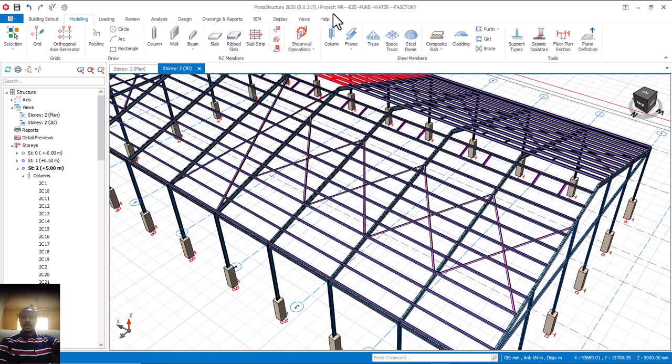This is ProtaStructure 2025. As you can see, Mr. Eze Pure Water Factory, you can see it here. It's still in the process, we are trying to do the roofing. So now we are still modeling, as you can see.

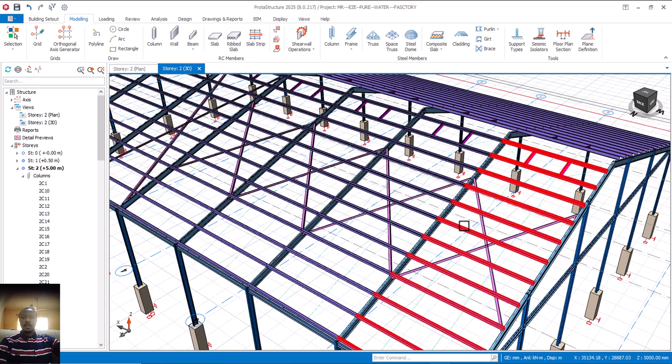We want to show you how to do this kind of bracing in Protastructure 2025. Can you see it here? This kind of bracing, if you look at it, is different from this one here, different from this particular bracing here. Can you see it? How do you make this kind of adjustment to it? And if it's double, how do you want to go about it?

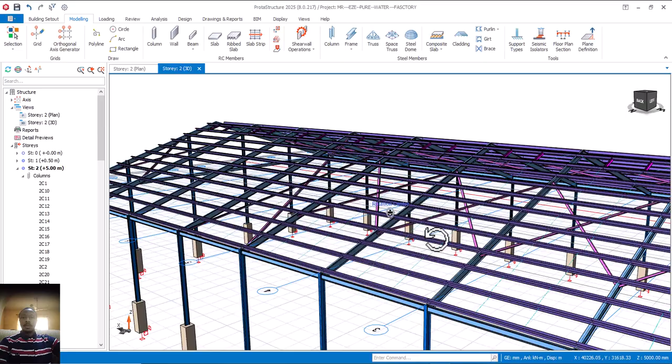All of this, I'm going to be showing you, at the same time the connection, in this particular video. Please, stay tuned, don't leave. Let's do it together to the end.

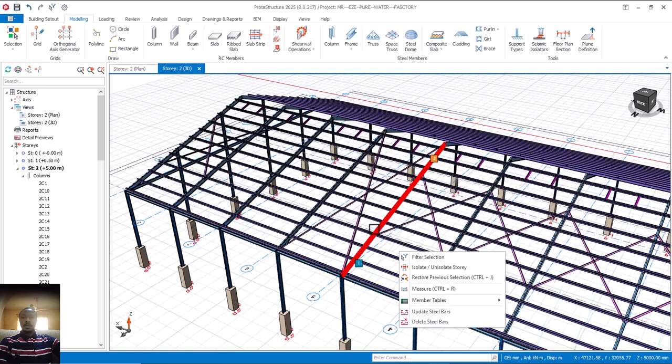So let's now see how this can be achieved. For now, I'm going to delete this one so that I can now show you how to go about it. All right, let's wait for it.

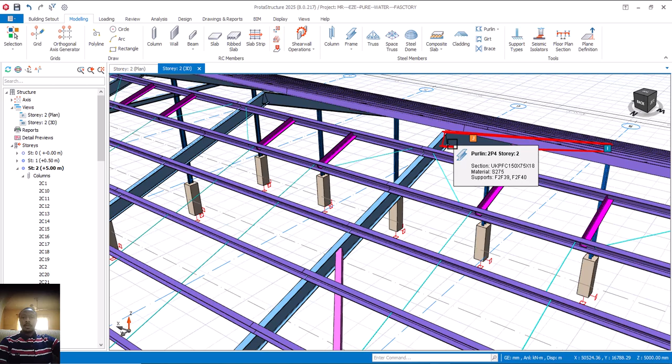Okay, deleted. So now for us to insert this particular type of bracing, because if you look at it, there's a support here, isn't it? And also towards the end here, there's going to be a support. But in between here, from here to here, is actually long to leave without being braced.

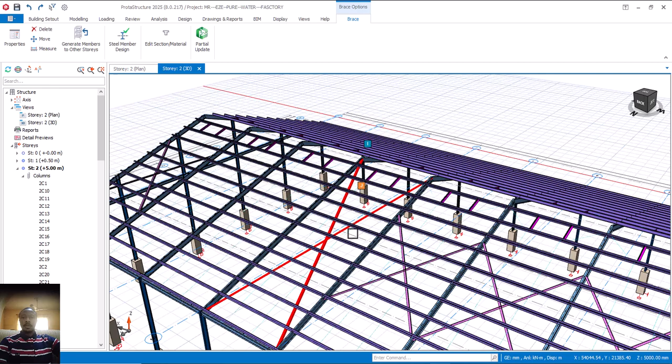Now, if you look at the one I just deleted, let me undo it, let it come up. Can you see? If you look at the one I just brought back, can you see the method of support from this place? Whereas there's going to be a support here also, and down here there's going to be a support too, a connection around this place, isn't it?

So that is fine. This kind of bracing is good, but looking at this span, I prefer this one, it's much more better, far more better. So let me delete this one now, and let me show you how this can be done. Let's wait for it to disappear.

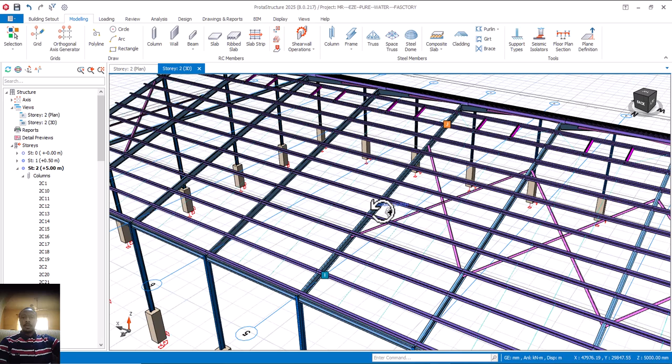All right, as I said, this is Protastructure 2025. Protastructure 2026 will soon be out. In fact, I can't wait personally, because there are a lot of things that software version will definitely solve. All right, so let's now go ahead.

So I'll come to my bracing here. Can you see under modeling here? I'll come to my bracing, come here now and click. And once I click on my bracing, I'll click on the first member and also the second member. So I'm coming, I've already done all of this one before.

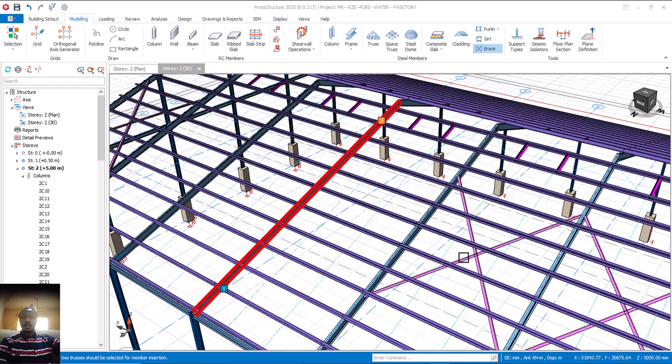So at this point now, I can now click on OK. And let's wait for it. Let's wait for it. Hold on. Can you see it now? Can we see it? You can see it now.

It has come. So I'll now go further now and click on this one and also this one. Is that okay? So it will still give us the same thing.

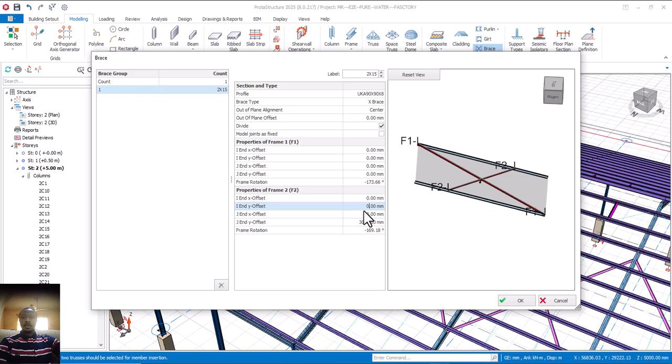But this time around, let's assume I want to make it double. If I want to now have a double, as in 2 bracing, is that okay? To have these 2 X bracing at this particular point. So first of all, you remove this distance that you have put. Remove them, turn them to 0 first. Then you can now see it now.

So you can now come to this place now and make it 2, and click somewhere else. Can you see it now? Can you see what we are having?

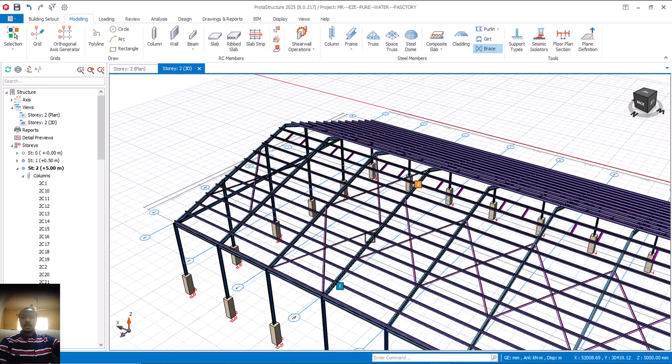So if I click on OK now, you see what we are going to have. Let's wait for it. It's coming up. Let's wait for it, correct. So can you now see the type that we have now, different from this? So this is how you make adjustment.

And also at this point now, definitely it's too close to this. You can adjust this place now. If I click on it now, I say property. Is that okay? I click on property. Let it come up again. So at this point now, here I can. Okay, this other side too. Let me see this one here. Where is it? Okay, this one I've stopped here.

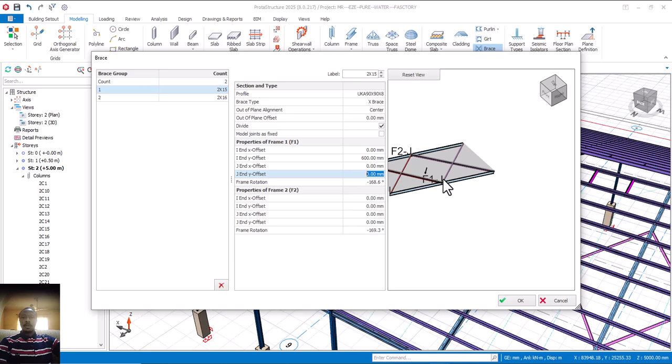So come to this other side now, this other side. Let me do this one first. 600 also. Okay, let's see. All right, this place has been done.

Is that okay? We are done with this side. So now that we are done with this side now, okay, so you can now see how we have adjusted this place now. So you can now see 600 and this other side to 600. That's why you can see here 600 and this one 600. Can you see it now?

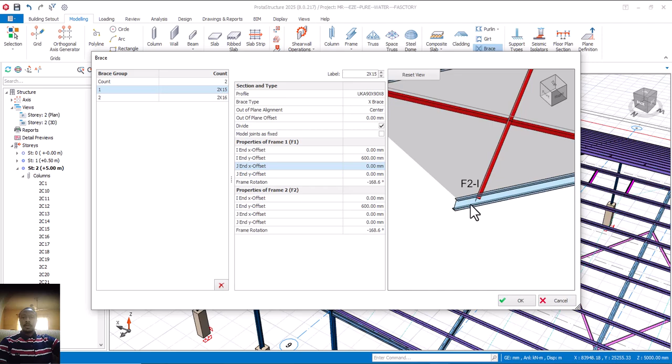So if I should go back now and click on this, let's see what we have. Let's see. Can you see it now? Can you see it here? Okay, so can you see it here now? Can you see this one?

If I should move it now, can you see we have adjusted? Instead of before it was here, it was here. So can you see where we have it now? Is that okay? So this is how you go about the kind of bracing that you want.

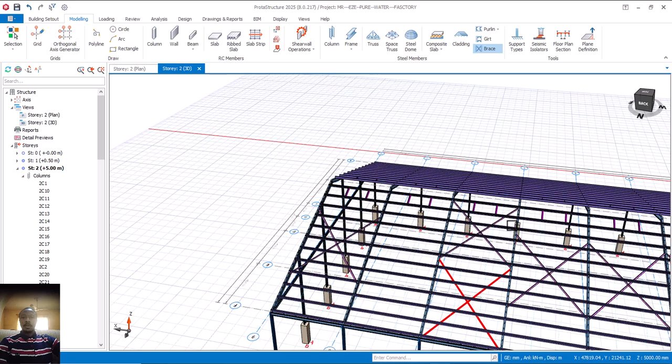But for us, this is the type that we want. So I'm going to delete this one now. I just used it to show you how to go about this type of bracing. Is that okay? So all right, let me click on this one now and then this one. Okay, I've now carried out my bracing. Click on this bracing, click on this and this one.

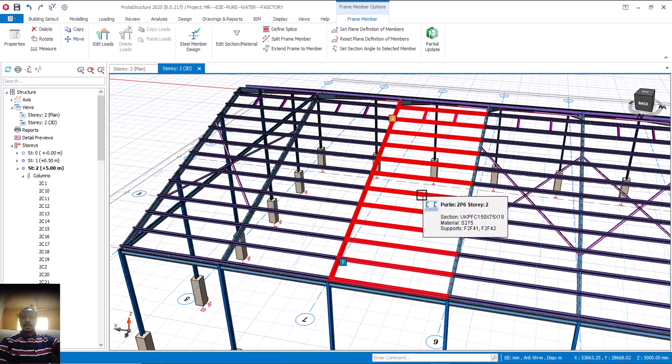This is a live project, so as you can see I'm still on it. Okay, so let me go back. Where is my bracing? Click on this one and this one. Okay, all right, it's still there. I have my everything intact. Okay, let me proceed.

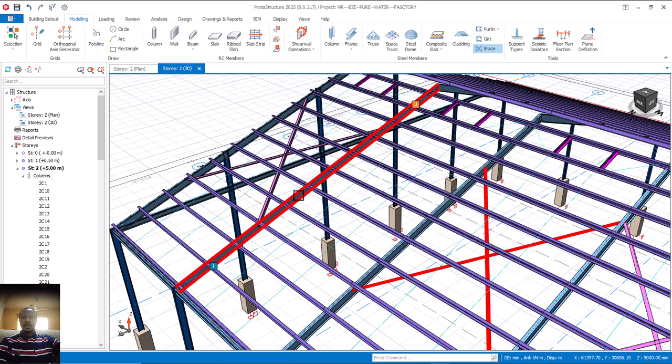All right, let me click on this one and also this one. I'll just click on OK because the settings have been done already. Let's wait.

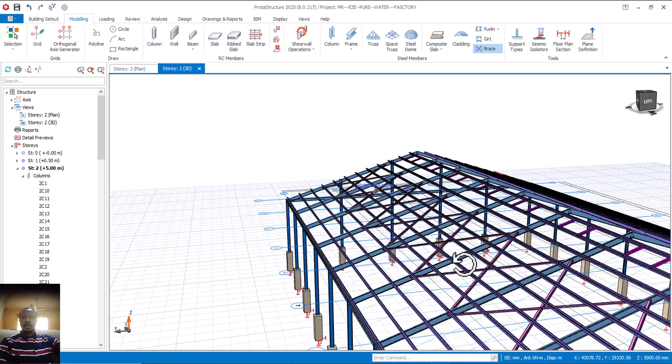We have what we call the Ekidel group. Ekidel group is a place where so many engineers within the country and outside come together to help each other solve any problem that has to do with design, civil, structural design, or anything called engineering. That's a place where we can rub minds together to solve such problems.

So as you can see this one now, can you see it? I have braced this particular one properly. So the next thing for me now is to do what we call loading. Before I load it, I'm going to be having my roof. Don't forget they are going to roof this place. In this place we don't have roof, but what we have in terms of roof is cladding.

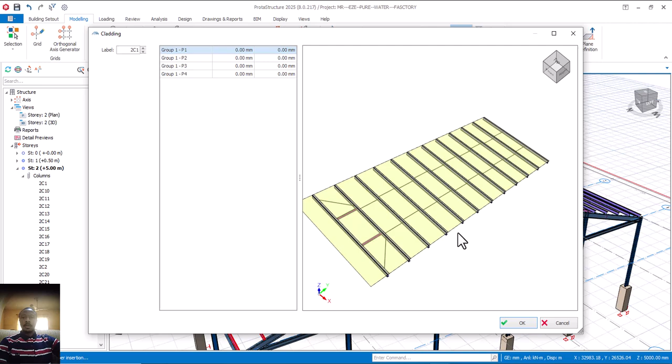So I'm going to click on my cladding, then let's see. I'll come here and click. So click, you can now see the cladding. It automatically takes the shape. If I want any adjustment here, this is where I will come. Let me make it 600 for example. Can you see it has shifted to this side? All right, let me turn it back to 0.

Let me come to this place now, make it 600. Can you see? Shifted to this side. So let me come and turn it to 0 again. If I come here now, maybe I want a different shape. You can see 600, different pattern. Can you see the place now? Can you see it has extended?

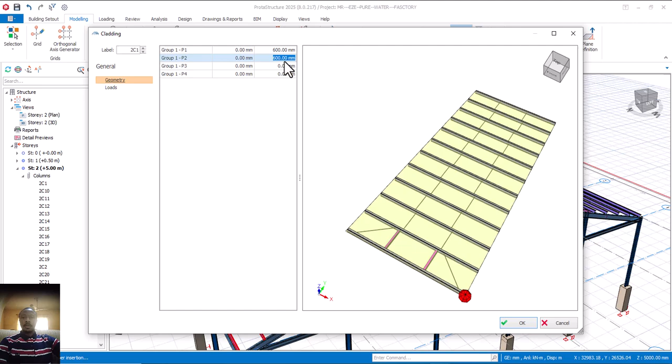So if I come here now, this other side I'm making 600 also. Can you see? So now let me turn it to 0. So whatever I want to do, this is how you go about it in this aspect. 0, can you see? Perfect. So now I will click on OK. Let's wait for it.

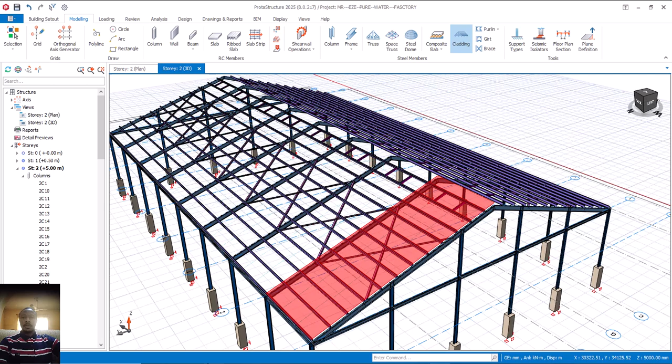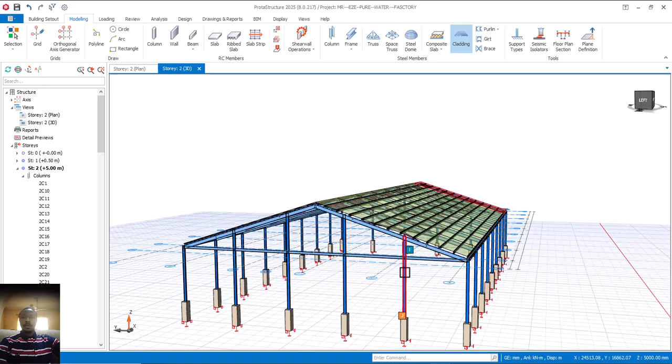So this is the last one now. I will click on this one again, then let's wait for it and click on OK. All right, let's wait for it to come up, to load. Correct, so you can now see what we have achieved now. You can now see what we have. Can you now see? But are you hearing me?

At times you discover that this place will be projected out a little. It will project out. This particular purlin will project out. How do you do that? Let me just click on this one and show you as an example. Click on this, also click on property and let's extend it. Let's see. Left cantilever length, let me see this one here, I think.

Let's say it's a 250 projection. Let's see. All right, if it's not the one, we'll come back and change it, isn't it? So let me click on OK. Let's wait for it.

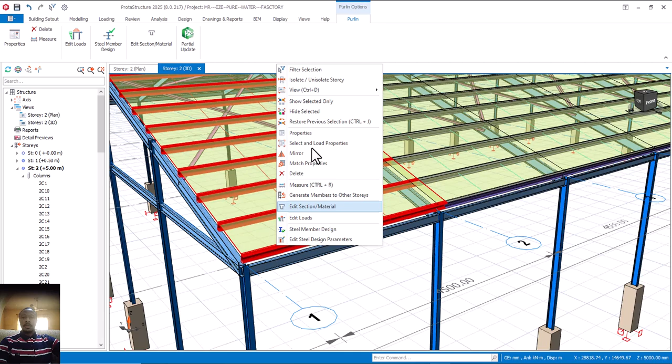Okay, it's not the direction. That's not the direction, so let's go back again. I'll come here now, turn it to 0, and then come to this side and make it 250. Click on somewhere else and click on OK. And let's see.

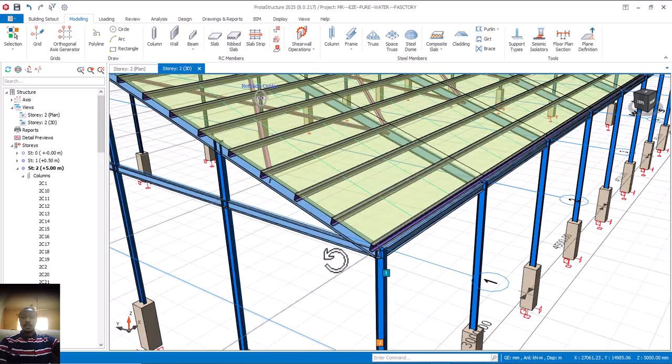Can you see? So you can now see it now, right? I believe we can all see it. Can you see the projection here? So that is how to go about it, which I'm also going to do to the other ones. All right, so automatically it takes the shape. Can you see your roof, your roof members? So that is that.

So now having done this one like this, the next thing is your loading. I'm going to be explaining something about this loading. I'll click on it, right click and click on edit load. So let's wait for it to come up.

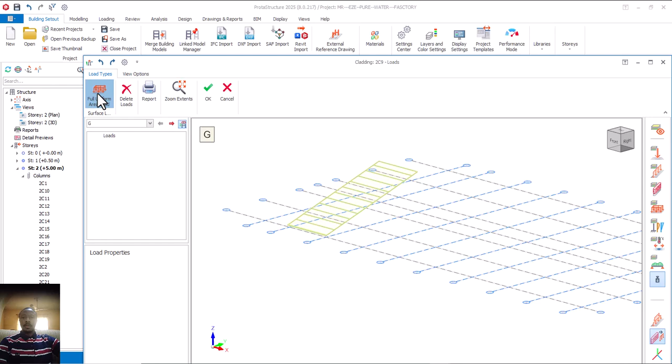All right, looking at this particular structure here, you now discover that we are having that particular cladding, which is our roofing sheet. So we are going to load it because we need the weight of our roofing sheet. I'll come to this place now and use full uniform area load, at this place of magnitude.

Now, when you are designing or loading your structure, especially this kind of thing, when you are loading your roof, you need to consider the environment or the country. If the country is a place where they experience snow, you need to calculate, because snow is like water on your roof. Even though later it might melt, before it melts or you remove it, at that moment it is acting as a load on your members. So you need to know that country and what is the maximum thickness of snow they have ever experienced.

That will enable you to calculate the load and put your magnitude. But in a country whereby they don't experience such snow, your load range is, don't forget, not for the entire structure, per meter square - that's your roofing sheet, the width of your roofing sheet - between 0.75 to 1 kilonewton per meter square.

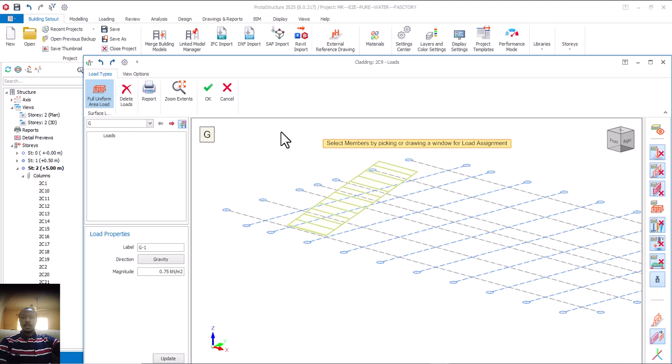But for me, I will use 0.75. I'll use 0.75 and then come to this place now and select it and let's wait for it. Can you see it now, pointing down? Can you see 0.75? Now some will be asking, why are we not using the other one?

This is for G and Q, isn't it? That's dead load and live load. Now the reason why I'm not applying live load is because, even on your own end, what is the live load we are going to be adding here? The structure is not that high for me to be talking of wind load. It's a small structure.

So there's no activities that will be going on the roof that I can refer to as my live load. The only thing that is going to happen on that roof is a permanent load, which is your roofing sheet. That is why I don't care much about live load on the roof. The major one is the dead load, which is your roof members, your roofing sheet. So having explained that - that is that.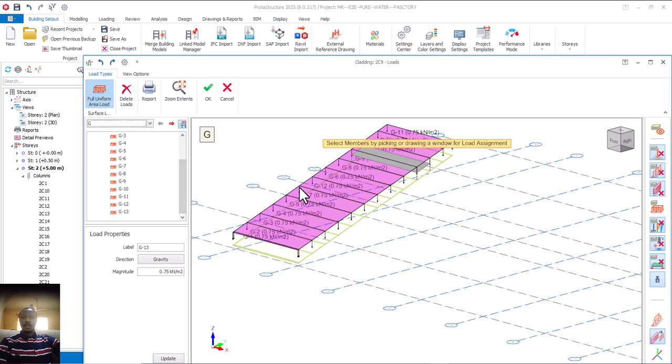All right, so I have now done this one. Now click on OK, and let's wait for it to load.

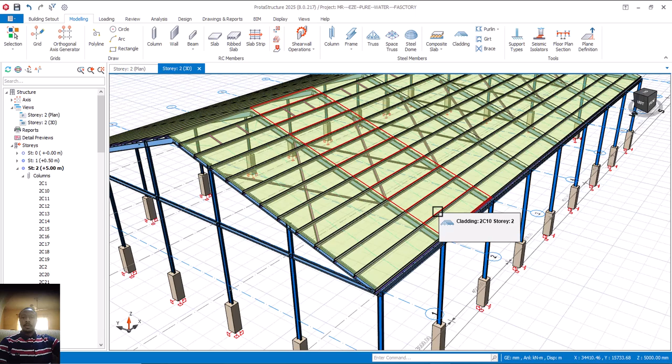As you can see now, this particular one has been loaded. If you look at my cursor now, you can see the cladding, you can see area load, G is 0.75 kilonewton per meter square. Can you see it now? So this one has been loaded, but this one is no load yet. This is how we are going to load everything. To reduce the length of this video, I will not be doing everything, but what I've just shown you is what I'll do to all.

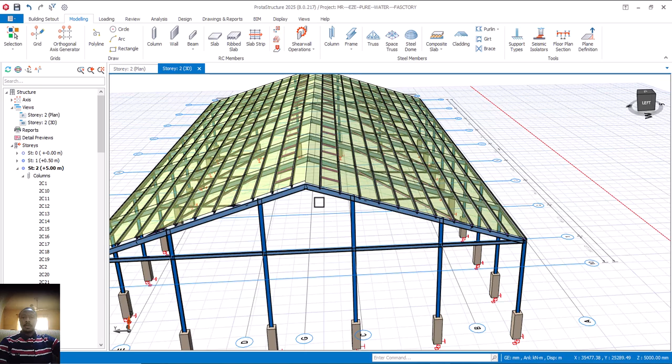So watch for the next part, whereby we'll be doing the connection of this place after we have finished all the necessary things in analysis and design. This part of roof is very common, as you can see. And the bracing, how we are going to do our connection, and how you know that your connection has failed - all of those things we'll be doing and I'll be showing you in our next video. Thank you very much. Till I see you in our next part, where we'll be doing the connection of this particular structure.

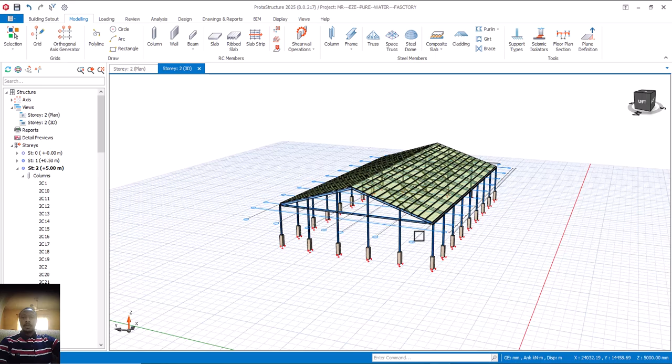And don't forget, even this place, before we stop, let me show you something very important here. That's why I said it's very important to watch this video to the end. Now at this point, if you look at this place, they are going to raise a block. If I should brace this particular place, if I should brace this structure, if I use X bracing, let's assume yes, they are going to use a block.

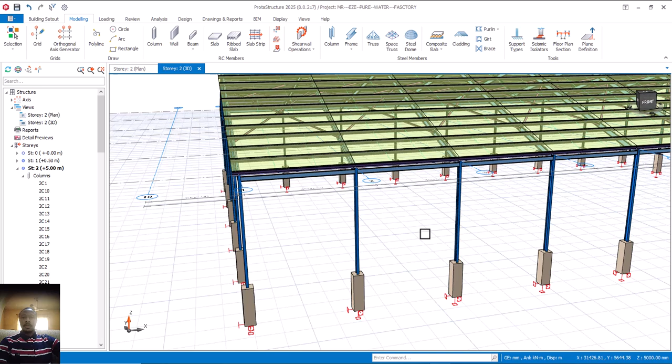They are going to raise block, isn't it? Definitely they are going to raise block, and I want to brace it. Now the question, how will I brace it? Am I going to use X bracing? My answer is no, because if I use X bracing, they will find it difficult in laying their blocks. So what kind of bracing am I going to be using at this point in this case? Because I cannot be using X bracing for these roof members. What am I going to use?

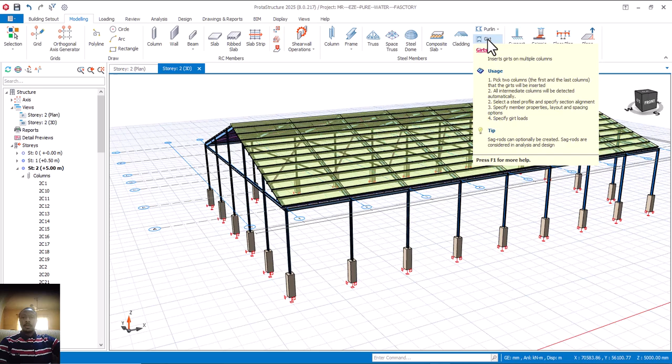I'll come to my Girt. I'll come to this place, click on it, then I'll now come and click on two members. For example, this one, I'll only show you this one. So if you now look at it, despite that it's like this, I'm going to explain something.

As it is now, you can see my sagging rod. It's still showing me sagging rod. Can you see this sagging rod? So they will still find it difficult in raising block, isn't it? So what I'll do, I'll come to this sagging rod, to this auto fit, and put on none. Can you see? It has disappeared.

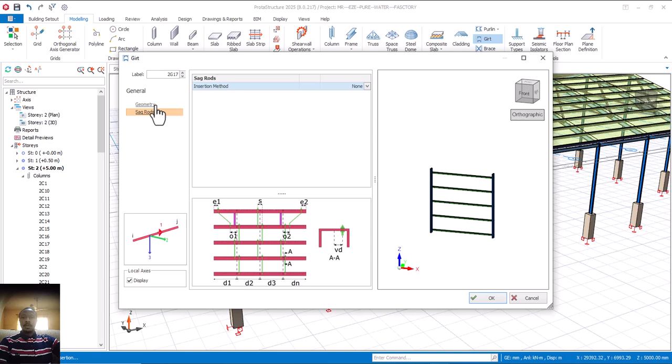I'll come back to this place called geometry. Now, I haven't done this one like this, but if you look at what we are having, can you see? It's outside your column — which is your stanchion, rather. We call it stanchion in steel, not a column. This particular bracing is outside your stanchion, isn't it? So since it's outside your stanchion, how do you now do it? Because if they still go ahead and raise this block, all this bracing, you'll be seeing them, isn't it? That is fine. How do you go about it? I'm going to show you now.

Before I explain other things, to do that now I'll come to this place where I have a perpendicular offset. Let me zoom in so we can see it very well. I'll come to this place now and make it, let's say, minus 150 for instance. Okay, perfect, can you see it has gone inside? So let me make it minus 200 now. Okay, perfect, can you now see it?

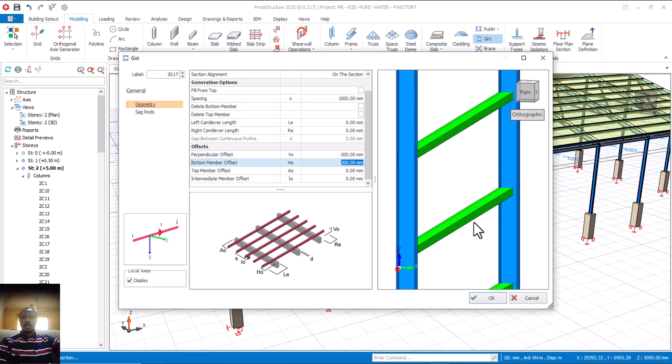Can you now see what we are having? If you look at this other side, there's nothing outside here, and if you look at this side, it's at the center, at the middle. So by the time they are raising block, automatically it will be covered. You will not see anything. You think that they are not being braced, but they are being braced. But now it's left for you — how do you want the bracing, how many blocks do you want them to raise before the next support?

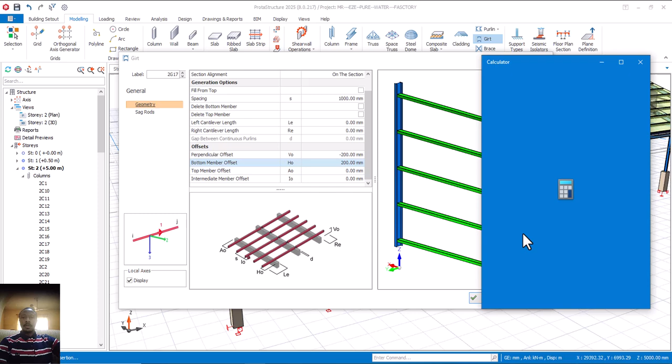So for example, let's say we are using a 225. Let's say we want to raise this thing 6 courses, for example. So I'm going to multiply 6 by 250. So let me say that's 1500. So at every 6 courses, there will be a bracing — that means the height is 1500. There's a calculation why I use that 250, is that okay?

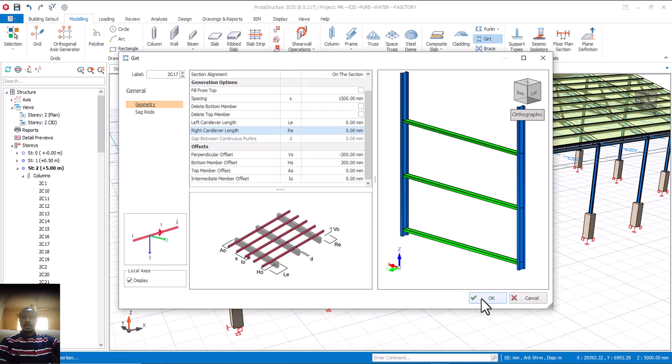So now I'll come to this place in the spacing and put 1500. I'll click somewhere here. Can you see it now? This is what we are having. So that means at this downside here, from here to here, 6 courses, from here to here, 6 courses, and from here to here, 6 courses. I will now click on my final OK, and let's see what we have.

Let's wait for it. Can you see it now? Can you see what we have? Perfect modeling. Can you see it now? So which all of this I'm going to be doing later.